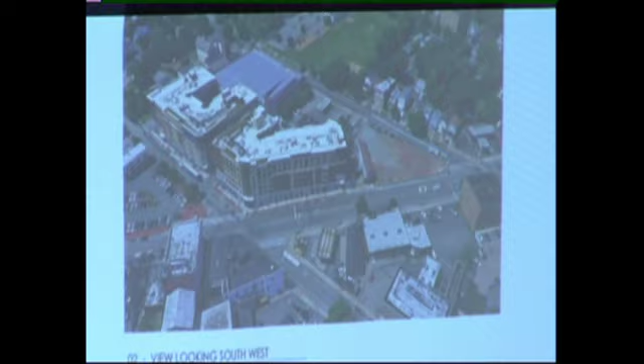View 2 is looking southwest, so you'll see the Valley and Bloom apartment building and the disjointed sidewalk condition here, with the two redevelopment parcels. View 3 is looking northeast, so you'll see the Orange Road deck under construction, and the intersection of Centro Verde Drive.

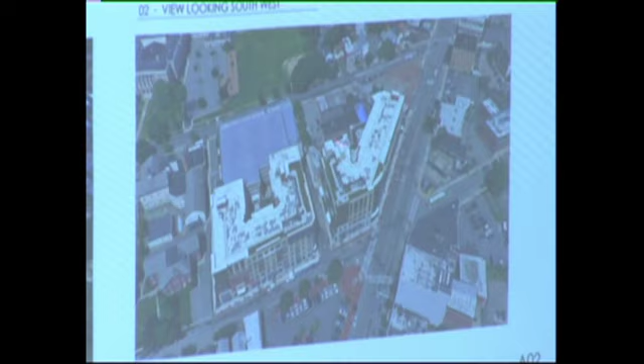Our development parcel being considered this evening, and lastly view 4, a northwest view. You see the Valley and Bloom apartment buildings, Centro Verde Drive splitting the two, and then our development corner on the corner of Centro Verde and Orange Road.

This leads us to a few images, which I believe were in Ms. Talley's report - streetscape images showing the MC Hotel under construction, and the current use on the property, a gas station and an auto body shop. Again, you see that disjointed public sidewalk condition, narrowing from an 8 to 12 foot sidewalk down to a broken 4 to 6 foot sidewalk.

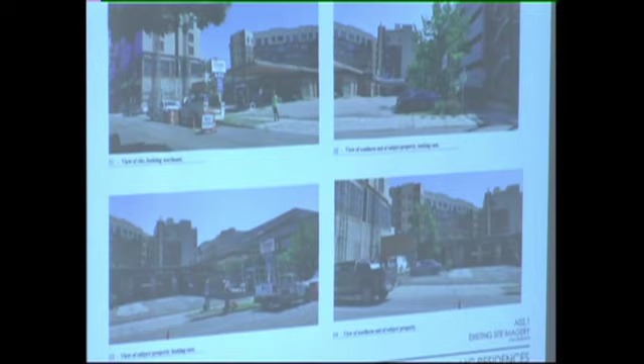There are various curb cuts along the frontage of this property, which are not conducive to a pedestrian-friendly streetscape. And lastly, you can see the Valley and Bloom apartment building, the scale and mass of that building, as well as the approximately 6-story Orange Road deck directly adjacent, just to give a sense of scale and massing of the existing condition.

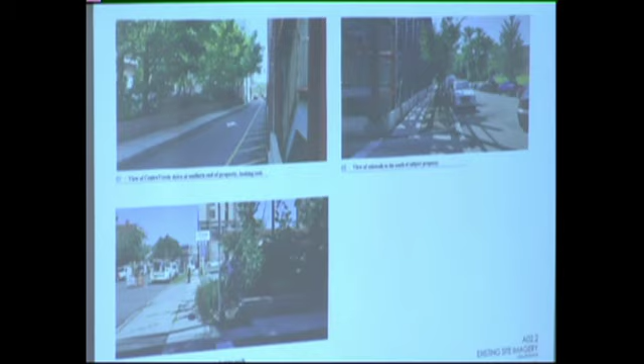Lastly, there are a few shots looking up Centro Verde Drive, again seeing some of the grading condition presently occurring. View 3 here is a great condition to get a sense of those multiple curb cuts and really an unfriendly pedestrian area along Orange Road.

So that leads us to our proposed aerial site plan. The area highlighted in green and tan is the proposed roof plan of our building. The green area is the green roof being proposed. There's a small amenitized roof deck, and the area highlighted in pink and gray represents the hardscape and landscape area of the public plaza, which we'll look at in greater detail.

Just to give you a sense of mass and scale, showing how that last puzzle piece fits in with the redevelopment of the downtown and really creating that connective corridor around that block.

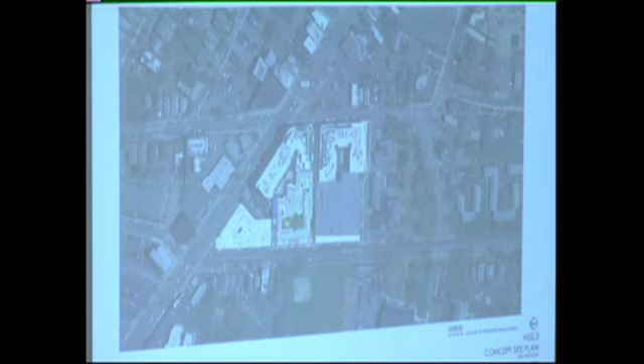So that leads us into sheet A10. This is an illustrative perspective view looking north along Orange Road. We're proposing here a new mixed-use community that's a 4-story structure, with 3 levels of residential being proposed over a ground level of parking and commercial retail.

There's approximately 2,300 square feet of commercial retail space being proposed on the corner of Centro Verde and Orange Road. You can see that accented by the storefront glazing that wraps that corner. The ceiling heights are approximately 14 feet, so it's an opportunity to really activate and anchor that corner.

We see that as the potential for a boutique food hall that could potentially pair with local vendors found within the township, which again would offer an opportunity for seasonal cafe dining outside that space and help activate that new public plaza space we're presenting in front of the building.

So compliant with the design standards and the bulk ordinance of the redevelopment plan, we're providing a minimum 15-foot setback from the property line to our building face. But because that property line is inset from the curb, the plaza space varies from 18 feet to 20-plus feet from curb to building face at different points.

We're also providing a small drop-off area in front of that plaza space, which could be used for Uber or Lyft or short-term drop-off.

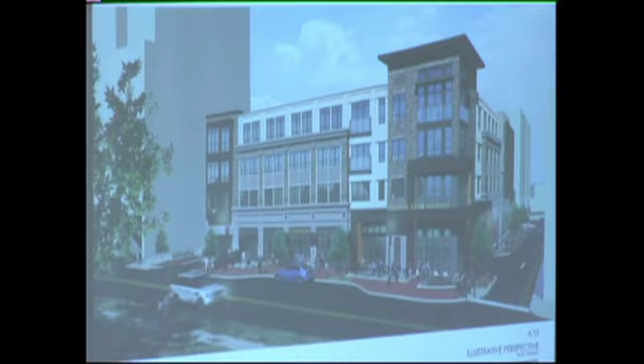So there is a 12-inch step back. It's not just a material difference. I believe that was a question asked before the Historic Preservation Commission. Not only is it a material change, there is a 12-inch differential between the plane of that wall, which we're creating with the structural wood framing that will allow for a reveal or depth in plane, which really creates, complying with the design standards, a true base, middle, top reading to the building. You can see the varied building materials, which I'll get into a little bit later.

So if I advance the slide, this is a view looking west, a tighter cropping that gives you a better picture of the public plaza being proposed here. You see Centro Verde Drive in the foreground and Orange Road to the left of the image. Again, you see how this public plaza space is approximately 18 feet from the curb to the building face here, and then is deeper at the 2 sides.

You can see the 14-foot ceiling height and expansive storefront glazing being proposed at the retail space. You can see the accent metal canopy being proposed here at the retail, where we're proposing some signage would be, and we're wrapping the underside of that with a composite wood panel to provide accent and contrast with some of the other building materials being proposed for the project.

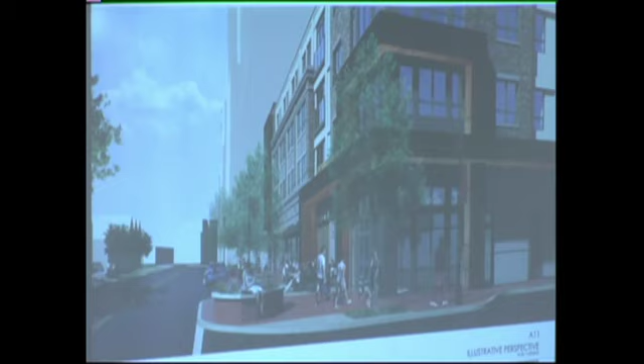It's okay. Good? Okay. The squirrel fell off the track.

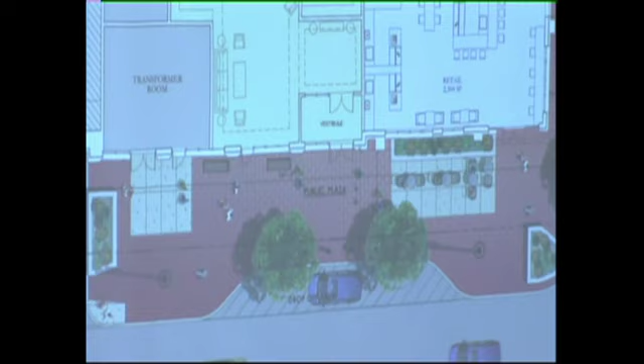If we advance the slide, this is the ground floor plan, sheet A03. The ground floor plan of the building, as previously noted, houses the parking as well as the residential lobby and the retail. As previously noted, there are approximately 67 parking spaces being provided on site, which is a combination of structured stacking parking spaces as well as surface spaces within the garage.

We will have testimony by a parking consultant at a later date regarding the specific details of the stackers and their operation. We do expect there would be a full-time valet attendant on site for this garage. We are providing a small valet office directly adjacent to the drive aisle. We'll defer to our civil engineer, who shows on his drawings where the queuing and stacking would occur and how that operation would work with the valet.

The area highlighted in gray is the back of house area for the project, with mechanical rooms located adjacent to the garage entry. The area in yellow is the residential lobby area, envisioned as a boutique hotel style lobby with taller ceilings, a package room, and a mail and Wi-Fi lounge space for residents. Directly adjacent, highlighted in blue, is the 2,300 square feet of retail space. We envision the residential lobby and retail space will have continuous storefront glazing that wraps around to activate the streetscape, complying with the design standards in the redevelopment plan.

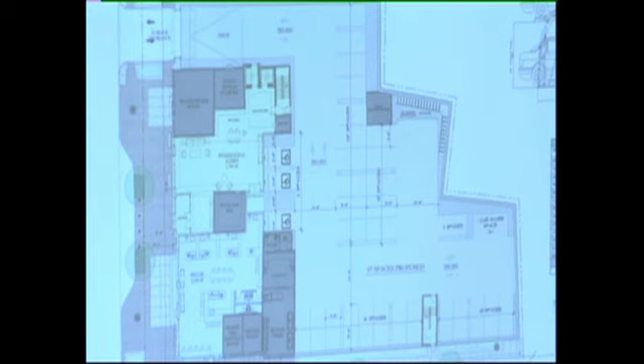I want to correct one thing - you keep saying it expects. We're seeing a plan, so it's not going to expect, it's going to be. These are concept drawings, illustrative drawings, but yes, this is what's being proposed and what's being considered for approval before the board. The use of the word concept is in this - these are schematic drawings, and what's represented in these exhibits is what we intend to build and submit for a building permit at a later date. You're describing the quality of the building and how it's going to look - correct. And if we grant the variances requested here, we're granting them in reliance on what you just showed us, including how the building operates. So when you say you expect a full-time valet, what you're saying is there will be a full-time valet attendant. We'll have testimony at a later date by our parking consultant providing specific details of that operation.

So the areas in gray are mechanical. One point I'll note is there is an internal refuse termination room for the project. There will be a trash chute, or access to one, on each level of the apartment building. Trash terminates internal to the building in a refuse termination room with a trash compactor, an area containing 2 to 3 additional 2-cubic-yard rolling containers, as well as recycle bins. There is direct access to this refuse area from the retail via this back of house area. We envision trash would come out curbside to a small loading zone on Centro Verde, picked up by a private hauler 1 to 2 days a week, complying with city ordinance regarding hours of operation. All of it is stored internal to the building and concealed from public view.

I have a question for you - is that loading area intended for moving trucks when new people move into the building, or how does that work? The loading area along Centro Verde Drive is designed for residential move-in as well as trash and refuse pickup, and it's also intended for drop-off and loading service for the retail. We've provided a side entry to the retail so you could load stuff directly in. Move-in for the residential building is typically a scheduled event - this building will have a full-time management office and leasing team, so that would be scheduled. Move-ins typically occur for 1 to 2 hours max, at set times, so that's a controlled operation.

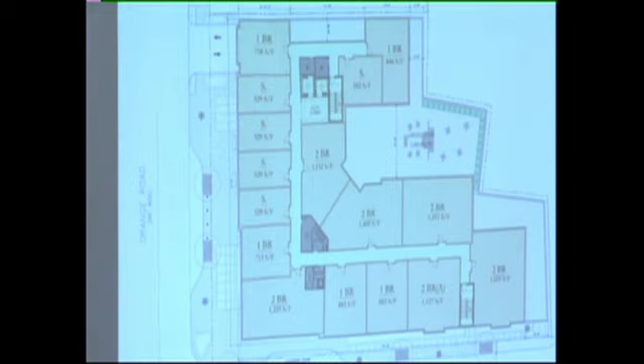Advancing the slide, this brings us to the third level of the building. You can see how the upper levels of the building are a typical double-loaded corridor. The area in yellow is the residential corridor. You can see that the units generally stack from levels 2, 3, and 4. Again, there are a handful of studio units, one-bedroom units, and two-bedroom units on each floor. The building is fully accessible, with elevator access to each floor.

Sheet A06 brings us to the fourth level of the apartment building, and lastly sheet A07 brings us to the proposed roof deck. Compliant with the design standards of the redevelopment plan, we intend to comply with the 25% green area requirement, or green roof area. That area is denoted by this green area and texture along the perimeter of the roof. The area highlighted in red, this red dashed area, represents the 10-foot setback requirement for potential solar and/or rooftop mechanical equipment.

So again, we intend to comply with that. There's a recommendation to provide an active roof deck here, an area for passive recreation and use for the residential community. The area highlighted in this hatched area is intended as a paver area with built-in planters and tree balls. We envision an outdoor kitchen, a few stainless steel barbecue grills up on this rooftop for residential use.

One point to note, my colleague Glenn Haydu, who's here this evening and is the Director of Sustainability for our office, will provide further testimony regarding the solar panels and how we intend to comply with the design intent as noted in the redevelopment plan.

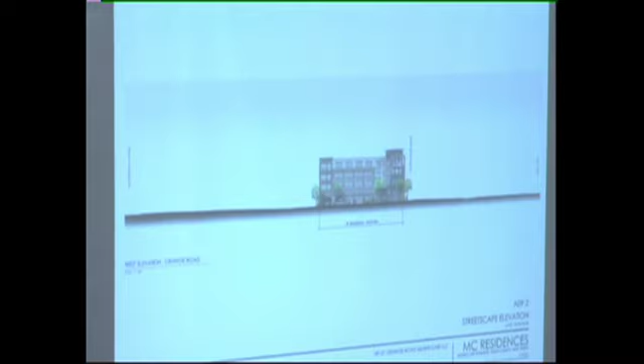With that, this is the west elevation of the proposed 4-story massing for our project being considered. If I advance the slide to A9.3, this drops in the elevation of the adjacent parcel as well as the MC Hotel to get a sense of the scale.

Sheet A09.4 drops in the 6-story Orange Road parking deck. And lastly, sheet A09.5 drops in the background. You can see the height of the 6-story Valley and Bloom apartment building behind our project.

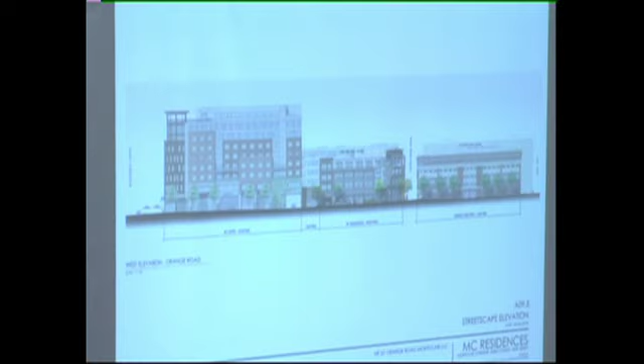As proposed here, the massing of the building and the project is stepping down to the scale of the Orange Road deck located immediately adjacent. So I feel architecturally that the scale and massing of this building fits with the existing adjacent Valley and Bloom apartment building and that found along Orange Road and Centro Verde Drive.

Advancing the slide, this is sheet A09. So we see the full west elevation along Orange Road, and you also see the Centro Verde Drive elevation. Specifically regarding the architecture, we've created a facade that is articulated both horizontally and vertically.

The facade is being articulated through a series of box bays as well as various materials used on this building. We've broken down the elements to create a series of solids and voids, and there's a distinct pattern to the building with a true base, middle, top reading.

The exterior building materials being proposed consist of a manufactured cast stone veneer used along the base of the building, and we're using a masonry brick veneer with some corbelling detail on levels 2 and 3, bringing that up 4 stories on the corner of the building.

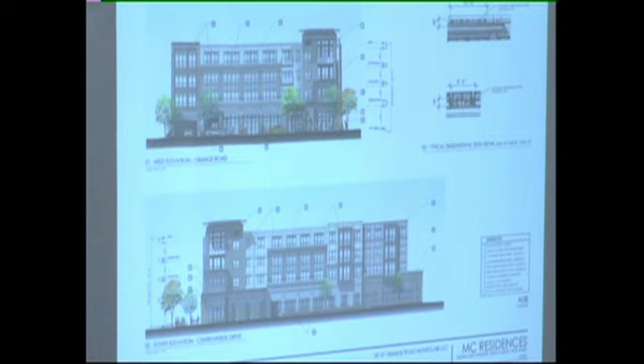The area highlighted here in off-white is a vertical fiber cement panel, which would be used with a reveal strip, not a batten strip, which was a recommendation in the Barton Ross letter that we agree with. The exterior residential windows would be an aluminum-clad wood window, which matches the recommendations found in the Barton Ross letter.

The ground floor facade, we are proposing aluminum storefront windows at the residential lobby, as well as the retail space, which wraps the corner on Centro Verde Drive.

Again, I provided testimony earlier about how that will help activate that public plaza space, and by turning that corner it will help continue that sense of safety and activation for the ground floor of that building. So as proposed here, there are true human scale elements being proposed at the base of this building.

The box bays being used on the upper floors of the building are proposed to be composite metal panel, which again complies with a recommendation in the Barton Ross letter.

The composite metal panel, in contrast to the masonry brick veneer and the other finishes on the elevation, provides for a contemporary contrast. And lastly, I did mention that we are using a composite wood cladding material in certain areas on the underside of the canopies to provide additional warmth to the facade.

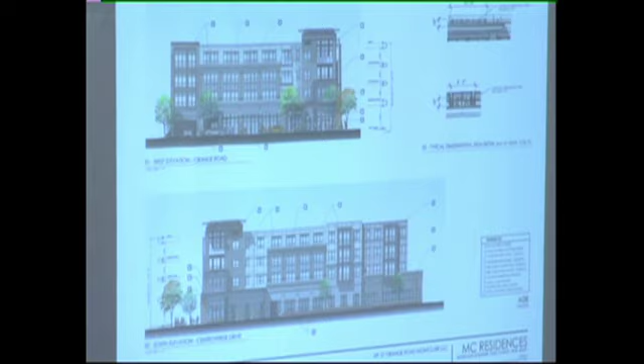So I have a question for you. Sure. You don't have a rear elevation, right? The back side of the building that is right next to Valley and Bloom apartments.

We do not have a rear elevation for the project to share with the board this evening, but it's my understanding that's not a requirement. Well, it effectively is because of the description of the redevelopment plan in terms of what the rear of the building needs to look like in relationship to the front facade. So we will need to see that.

Okay. And my understanding from looking at it is that you'll be pretty close to the apartment building behind it. And as you build up, you'll be covering up what exists as windows there now in that other building. Is that correct? No, that's not correct. We will not be covering up any existing windows that are there.

Well, as you build up, you'll be blocking light from those windows, right? The building steps back from the adjacent apartment building.

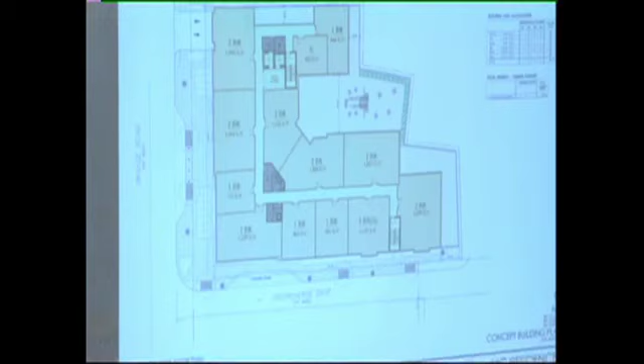Well, that's why it'd be handy to see the rear elevation, because I don't quite get it. So if we come back to the typical residential plan, the ground floor of the building abuts the property line with approximately an 18-inch setback. But at the residential levels, we are stepping the building back from the adjacent property line, so it allows for us to have windows on the end elevations of our building. It doesn't interfere with the existing Valley and Bloom apartment building.

So how far in is your building from the property line? Did you just say 18 inches? At the ground floor, the base of the building, yeah, the parking garage is approximately 12 to 18 inches off of the property line. But again, there are no windows on that adjacent property. The ground floor use of the Valley and Bloom apartment building is also a parking garage or parking level.

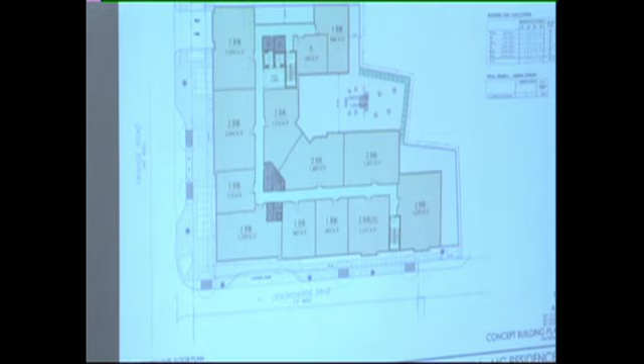Yeah, but I think the second and third floor up, there are windows on that side. Yes, and we intend to step our building back. Again, we don't intend to interfere with the existing facade of that building. Those windows will remain in operation and get some sunlight. They should get sunlight, yes.

So my other question was, you had mentioned there's a building there that you said was a plumbing office or something. There's an adjacent parcel, I'm not sure what the exact use is, but it's some sort of industrial use. And that's going to remain? That's my understanding. That's not subject to this application being considered in front of the board this evening.

Wow, okay, thank you. I have a question. There's a clear space between the deck and the residences on Central Verde Drive. So what is on the opposite end between the residence and the hotel? What is in that space? It's about 25 feet wide.

That's an existing parcel, I believe that's lot 21. So it's empty? It's not subject to the site plan application, it's the existing condition of what's there today. It's a one-story structure, I believe, actually an adjacent property owner's where it's not our property.

And that's shown on there? Those little windows on the bottom? It's being shown here. Really? It's an existing one-story structure. I believe there's an overhead garage door on the ground floor level and possibly a man door, and that's it. It's just a brick facade.

I never noticed, it's set back from the street. And what's in there? Plumbing storage. That's the plumbing store you referred to? Storage? Yes. You think it's part of the garage. It's his shop, it looks like it's part of the garage area. Whose shop?

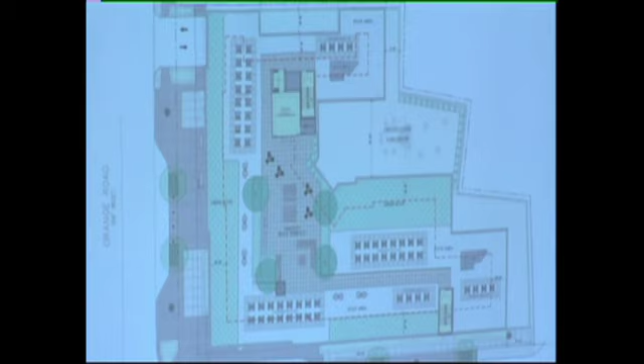It's also recommended in the plan that there be an amenity roof for the residents—a great outdoor space. That's recommended but not required, but we feel it's a strong proponent of this design and something the residents in the town would like. So how do we get solar panels on here?

Once we go in and do that 10-foot setback, this diagram shows the hatched area as what's left of the roof that allows for solar panels. That takes our allowable roof from 17,000 square feet down to about 10,000 square feet, so we're already pretty close to 50%—and that's just doing 100% of that area as solar panels.

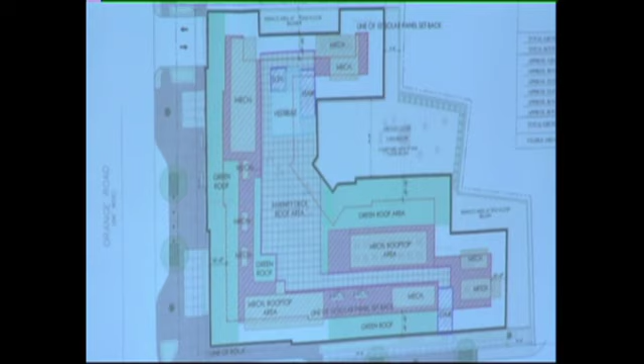The blue line we show here would meet the 50% requirement, in order to keep the mechanical systems. Again, that's a good solution because it doesn't require anything on the facade of the building—no through-wall penetrations for PTAC or lower-cost HVAC systems. The bathroom exhausts go up vertically rather than through the sidewall.

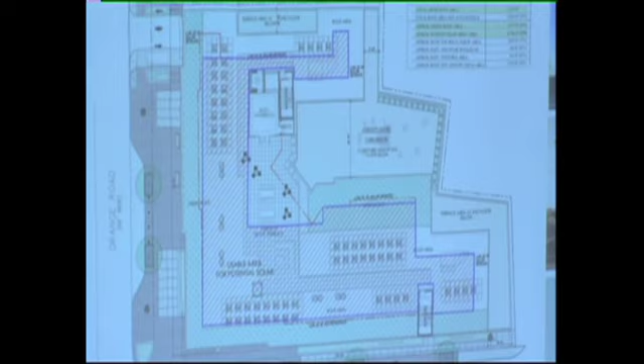So one alternative to this is what's called a renewable energy credit. What's the goal of solar? The goal of solar is to produce renewable energy that goes into the grid. Solar panels generally have a life of about 20 years, and those panels are going to generate a certain amount of energy over that 20-year lifespan.

What we're proposing is to purchase renewable energy credits, called RECs, which are purchased off-site. We would meet the demand that would be produced by these solar panels, but through a vehicle called RECs, recognized nationally, to buy that energy off-site. So we would buy wind power or solar power, equivalent to the solar panel system on the roof, for 20 years—20 years worth of power that comes from renewables.

Both LEED and Green Globes recognize renewable energy credits and award points for them, but they only require a 40% purchase over 3 years. So to make a 20-year purchase is pretty substantial. We like this solution because it meets the goals of the redevelopment plan to provide renewable energy, it allows us to do the 25% green roof, it allows us to provide a rooftop amenity for the residents, and it keeps a very clean rooftop for the project.

You can see the little diagram here. Generally, fossil fuel is traditional generation that goes into the grid. Our solution is renewables—it could come from anywhere in the country and go into that grid. We would purchase it specifically for our project, it goes into the grid, and that offsets fossil fuel generation.

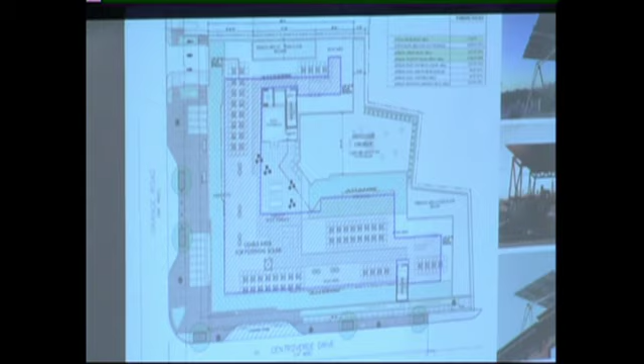Wouldn't you also have a height issue if you put solar panels that tall? If they're set back 10 feet from the roof edge, nowhere could we find that they contribute to height. It does state that equipment associated with the solar panels would need to be screened. I interpreted that to be like the inverter, not the panels themselves. But that's our interpretation, so we don't believe it contributes to height from our review of the redevelopment plan. Screening would only be required for mechanical equipment.

And with that, you're also saying that's the only configuration you can have those condensers—those are air conditioning condensers, right? We can move them around, as Mr. Johnson mentioned, especially to make sure they're inside the 10-foot setback. You have them in clusters now. Right, and it's just a math problem—you need so much clearance between them for them to effectively operate, so they're not discharging heat onto each other.

Sure, but the clusters that you have there—if you just put them in a line, made them in a straight line around, it looks like it would work. I'm just hypothesizing here. I'm just questioning the presentation that it's either 10-foot high towers of ugly solar panels or buying energy from another source. I don't buy it. Based on what I'm seeing in the outline of the rooftop, I would think there would be some way to configure it, particularly if you're not going over top of the inverters—you don't need 10-foot high towers.